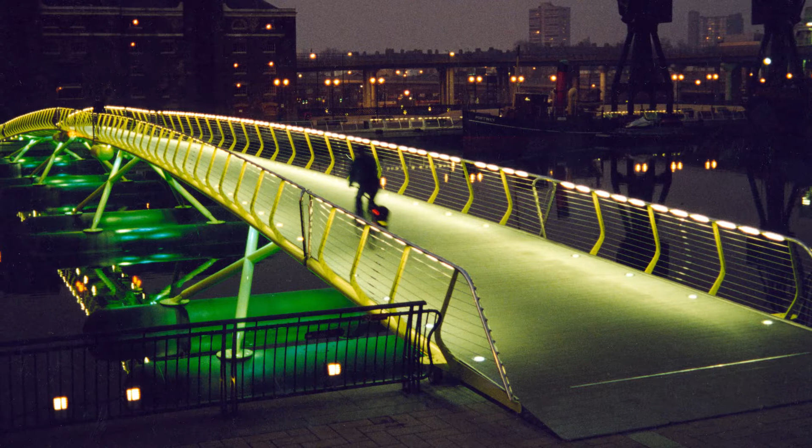From the start, when we were Future Systems, we were keen to challenge the status quo. This bridge in Canary Wharf was the first civilian floating bridge when it was completed in 1996. By creating a low floating structure, we placed emphasis on the horizontal stretch of water rather than the vertical dominance of Canary Wharf. The ambition was for the lightest possible touch, and you can't get much lighter than simply floating on water.

Prefabrication allowed us to de-risk the project somewhat, and when it was completed on time and under budget, it also de-risked Future Systems, as people could see our ability to realise projects.

The media centre at Lord's Cricket Ground was a litany of firsts. Our aim was not, nor has it ever been, to challenge technical boundaries simply because they exist. Our projects are always the result of the balance between form and function. At Lord's, the transformation of a complex brief into an elegant solution that captured the public imagination was made possible by a marriage of technical and conceptual inventiveness.

We created a design to respect and savour the essential nature of Lord's, but also a design that spoke of modernity. It was a vision that our clients supported, even if sometimes they were a little unsure of what we were doing. As the first semi-monocoque building, it represented a breakthrough, not just in the creation of this new three-dimensional aesthetic, but also in its method of construction.

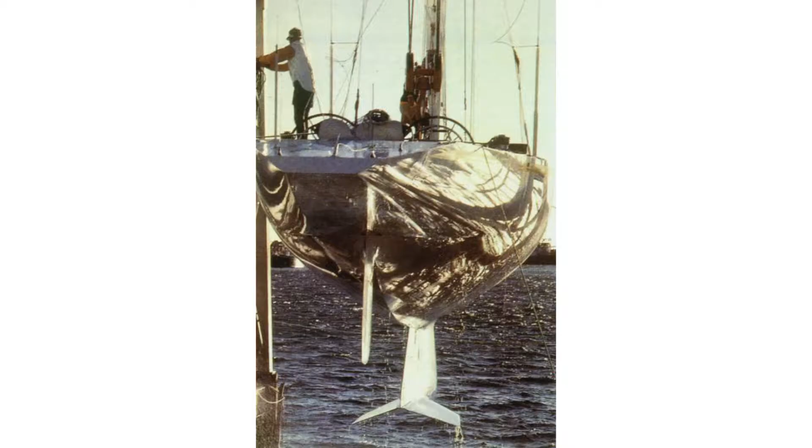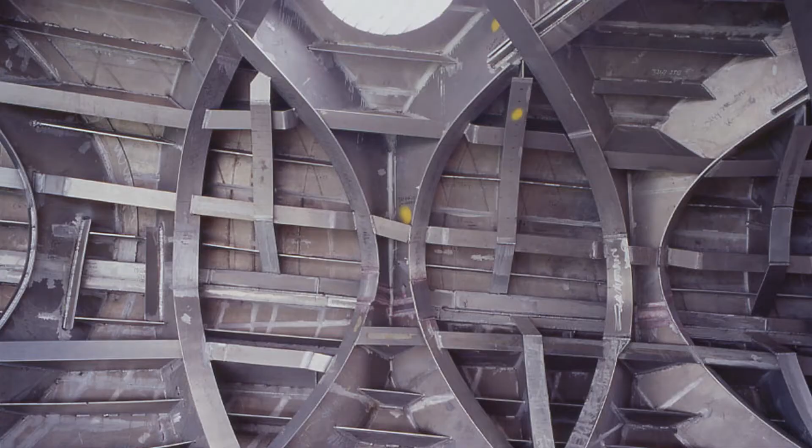The building was built and fitted out not by the construction industry, but by a boatyard, using the very latest advances in boat building technology to create the enclosing skin of a smooth, white, seamless shell. Without realising it at the time, we had designed the first all-aluminium building in the world, which also meant we had to rework building codes to satisfy the fire regulations.

Sometimes you need to prove that you're not wrong, you're just early.

At Selfridges in Birmingham, our ambition was not only to design a state-of-the-art department store, but to create a landmark for the city so that the building itself would become a catalyst for change. The plan traces the line of the site and then pushes beyond the pavement line to maximise floor area. What was not obvious was how to clad this three-dimensional form on a developer's budget.

Finding a means of cladding this curvaceous volume, we took inspiration from fashion. But our real clue came from history. This amazing Baroque church in Naples uses the device of complexity through repetition, playing with light and shadow to break down a massive volume. We reinterpreted this as a skin made up of thousands of aluminium discs. Unlike Lord's, this was not technically complex, but it was a very different way of looking at cladding. We didn't think it was risky, but certainly others did.

Persuading the client to go with a totally bespoke cladding system was not easy, but the discs have become an important part of the identity and iconography of the project.

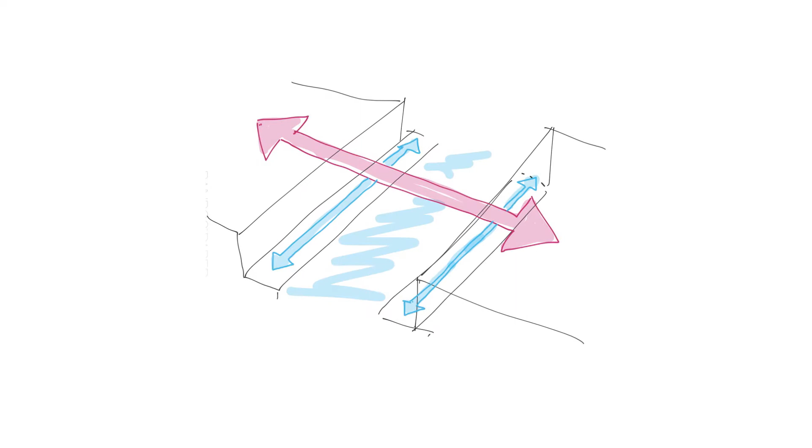The proportions of most bridges are long and slender, but the Spencer Dock Bridge across the Royal Canal in Dublin is almost wider than it is long. Designed to span only 40 metres, it takes trams, traffic and pedestrians across the docklands.

We wanted to exploit these unusual proportions by treating the bridge as a piece of landscape, as a surface rather than a structure. So we had to find a construction technique that would allow us to exaggerate the thinness of the horizontal surface. At the time we were designing the bridge, we were also working on a piece of furniture with a company who produced high-density polystyrene, which we CNC cut to create the structure for the bench.

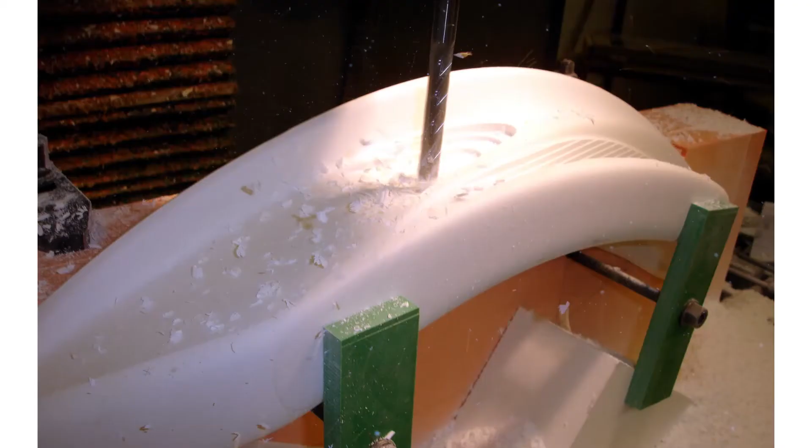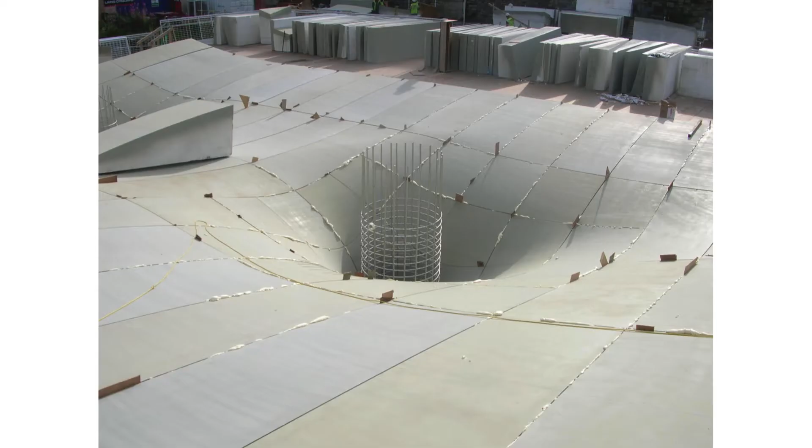This same technique, using polystyrene blocks as permanent formwork, created the desired slenderness for the bridge and proved to be an extraordinarily fast method of construction. This innovative use of CNC cut polystyrene is to date the largest application of the material to be used in this way.

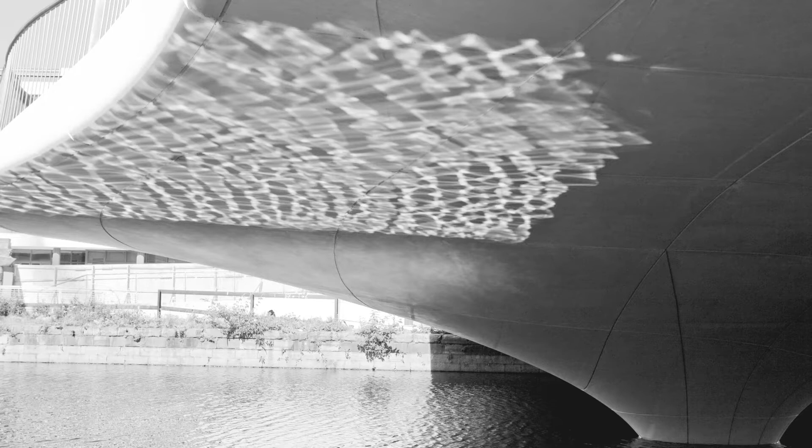The result is a soft geometry with fluid lines and undulating concrete surfaces that allows the bridge to merge with the piers in a single movement. The construction method enabled us to complete ahead of schedule and under budget.

Risky doesn't always have to mean expensive in terms of time or money. There was risk here as to whether we could even make a project out of this building, so I was reluctant to take it on, but we did, so we had to find the potential behind what was a very pragmatic brief to add 3 floors of offices. We needed to be ambitious about the impact that a modest extension could have on the urban context and find a way to give presence to a narrow alley.

The billowing form appears intuitive, but it is in fact a response to the very real constraints of the site: a lack of daylight, an unprepossessing building, and the first 2 floors being by default a blank facade because they hide the storage belonging to Bershka. But we're at our best when we have resistance, so we oversailed the site above pavement level to let in maximum daylight and created more space by doing so, and then created impact.

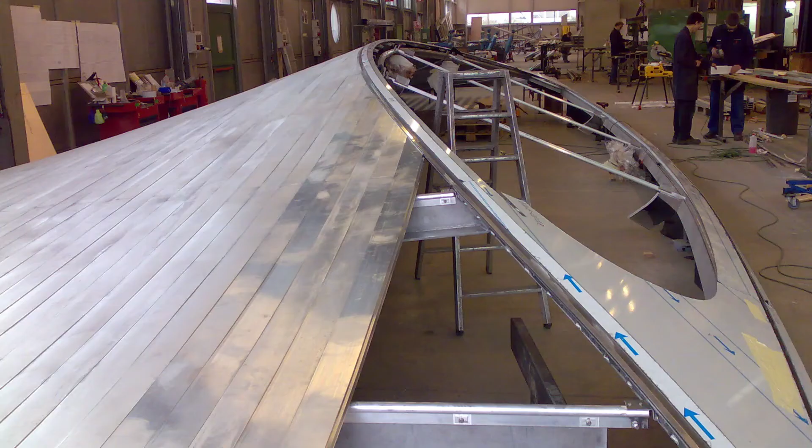We once again transferred technology from the boat building industry, but rather than use aluminium to create a seamless skin as we did at Lord's, we used a system of aluminium profiles used in the production of high-quality ship hulls. But to do this, we had to persuade the builders to warrant the system because we wanted to curve the sheets the opposite way from their system. The altered curvature works well technically and aesthetically and reflects the city back to itself.

A project that may appear to be riddled with risk and over-ambition when viewed from the outside may not always be the case. This subway station for Naples, a collaboration with Anish Kapoor, reimagines the station as a piece of public art, expressing the tension between form and function, between art and architecture.

And yet our intent and proposals were entirely bought into by the client. Even though there were storms, and no project is straightforward, and no project in Italy is without terrible bureaucracy, these were relatively minor and weathered in the early days of the project. We managed to hold on to the integrity of the idea while resolving all of the hugely demanding technical and complex constraints of a public station.

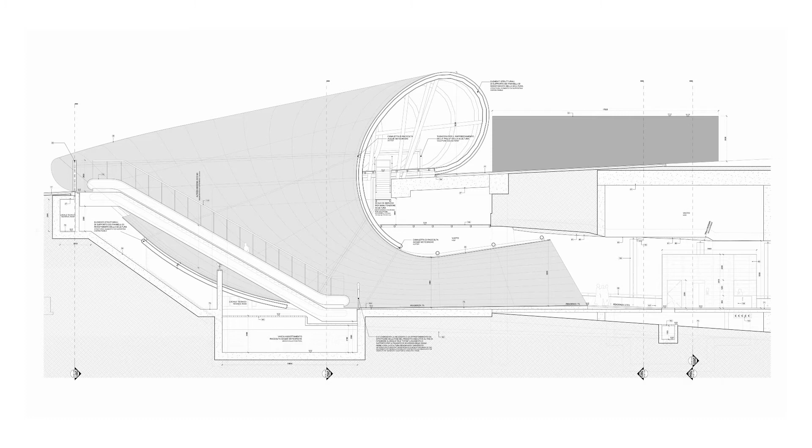It was this idea of resistance as a positive force that I think is the fundamental difference between art and architecture. We brought our confidence and expertise from working with boat builders at Lords and Hills Place so that the design of the entrances fabricated in Holland was relatively risk-free.

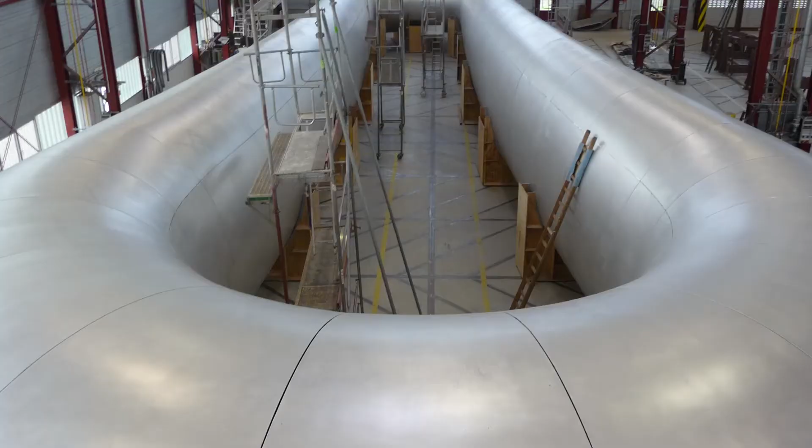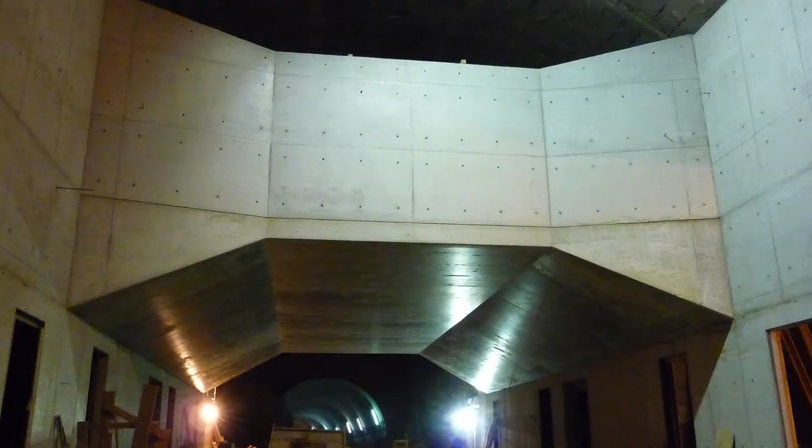The pieces were assembled, signed off and crated up ready for shipment to Naples, but then a new mayor arrived and the spectre of corruption within the municipality brought the project to a halt. The contractors went bankrupt, so the entrances remain in the boatyard. The site was occupied by the construction workers because they hadn't been paid. And the next station has yet to be built, so for now it's a line to nowhere.

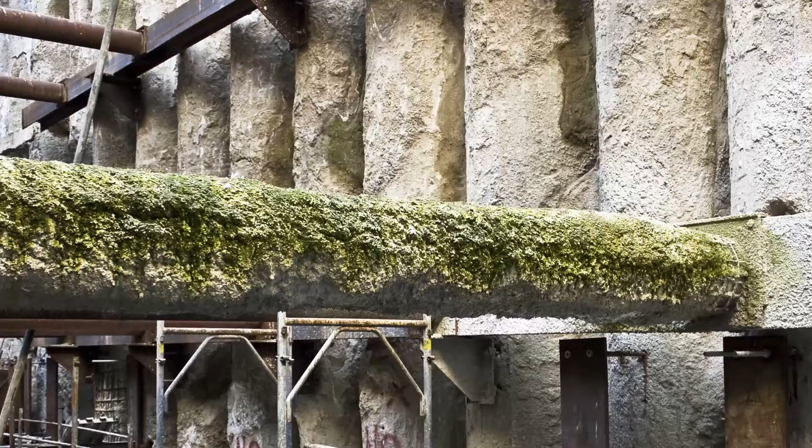Construction has been going on for so long that moss has grown over the exposed concrete piles, but when the project resumes, we intend to keep the moss to illustrate and memorialise the painful birth of the project. The risk in this case was not in our design, but the result of a fragile and overly bureaucratic political system.

We took a calculated risk in this project in going way outside the brief. The competition brief for the Louvre was to improve the visitor experience by addressing the congestion at the point of entry. The pyramid was designed to deal with only a fraction of the number of people who visit the museum today. We instinctively understood that the solution did not lie in the pyramid, but at the threshold of entering the museum.

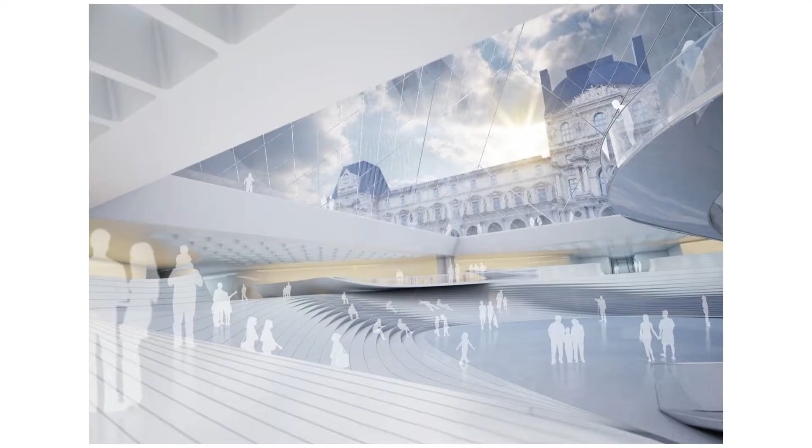So we argued that you should enter through the original palace entrances, and in this way, we could liberate Pei's beautiful pyramid. However, this understanding lost us the competition. In the client's eyes, we were not playing the game. We'd gone way too far by delivering what we felt the Louvre needed rather than what the client asked for.

We lost the competition, but we rescued success from failure, because for us it was a very important piece of conceptual thinking that we have gone on to successfully develop in other projects. What we learned fed directly into our proposals for the competition for the V&A in Exhibition Road.

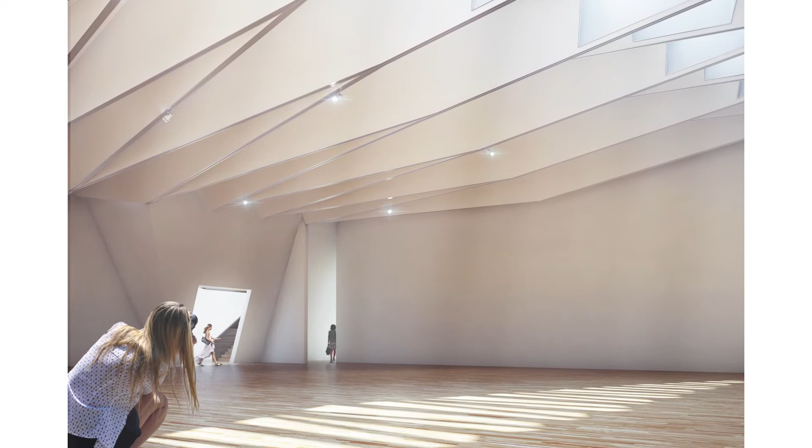Accidents, chance encounters, intuition, twists of fate are as much a part of the design process as logic or forensic analysis. Each project is unique in its complexities, and there's no better example than the V&A.

The brief called for a vast new gallery space to be created below ground and for a new entrance off Exhibition Road, and the creation of a new courtyard above the gallery. So our first move was to reimagine the dialogue between street and museum by breaking down the barrier between the two, allowing people to drift in off the street to use the new courtyard space.

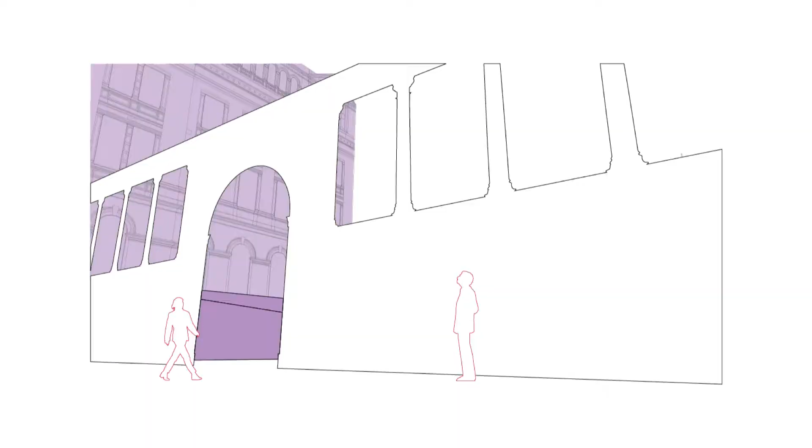But to make this realisable, we had to address the issue of the Grade 1 listed Aston Webb screen, which created an opaque barrier between Exhibition Road and the museum. The screen was originally designed to hide the boiler rooms, which have long since gone, so we argued its purpose was no longer to conceal, but to reveal the fabulous elevations of the V&A.

We took a massive risk in proposing a radical alteration to a Grade 1 listed building. But by opening up the screen and blurring the threshold, taking the museum into the courtyard, we'd unlocked something. It was a risk that ultimately won us the competition.

That the major intervention will be below ground is something of a paradox, and in seeking to resolve this paradox, we came up with a notion of making visible the invisible, which has directed our thinking at every level in this project. Sometimes, in architecture, a very abstract notion can drive a physical form, and that's been the case here.

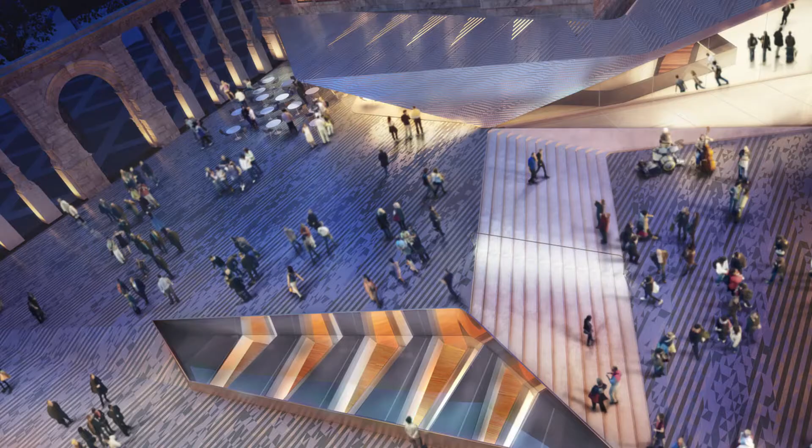We've created, in effect, an outdoor room with a fabulous cafe in the sun, but it's more than that. It gives you an intuitive understanding of the museum. The V&A's mission is to be didactic throughout its buildings and its collection, and we want to continue this tradition by revealing the very structure that supports the courtyard and that's also the roof of the new gallery space below.

We took another risk. Counter to the brief, we let daylight into the galleries. We designed an oculus which is conceptualised as an empty museum vitrine, revealing the gallery roof structure supporting the courtyard. The inside face of the structure is lined with red aluminium to look like the red velvet lining of an old-fashioned vitrine, and through the gaps in the structure you can see the void of the gallery below.

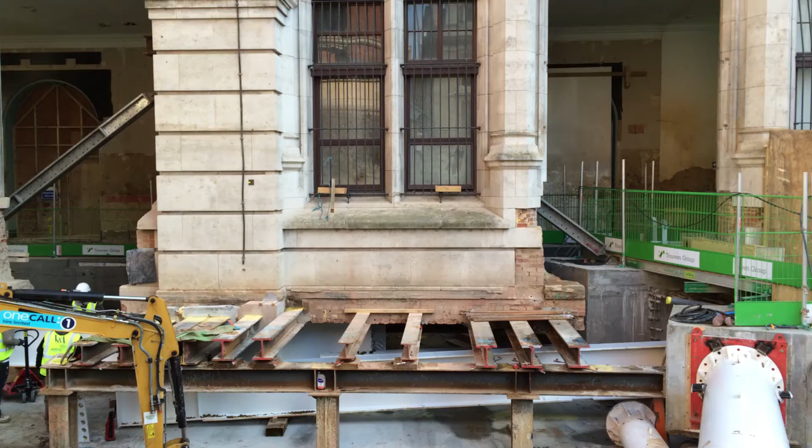This project is a huge technical challenge. We're digging a hole 15 metres below ground, piling 40 metres down within a metre of a Grade 1 listed building, and underpinning a wing of the V&A and its collection as we go.

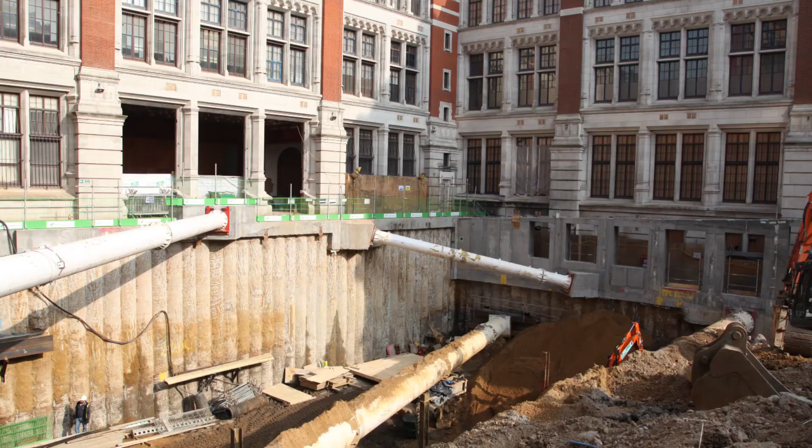Cambridge University was so fascinated by the challenge that they installed fibre optic monitoring systems into the tension piles purely for research, so that tension reduction and uplift can be monitored. The findings will determine if traditional models based on elastic theory accurately represent reality. The results could have repercussions on building sites across the world and perhaps make them a little less risky.

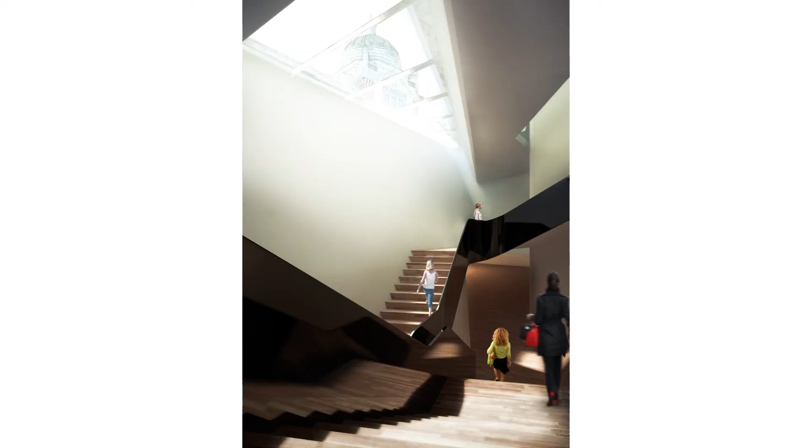Descending 15 metres below ground can be very disorientating, but we framed views to give you an understanding of where you've come from in relation to the rest of the museum. We've created two stairs that slide past each other, one to go up and the other to go down. It's a piece of theatre, partly to deal with the number of visitors, but also to ensure that you exit through the shop and don't enter through it.

We've used daylight to draw you down below ground, and at the bottom of the stairs there's a magic moment where there's more daylight than at the top.

The expression of the ceiling derives entirely from its function of spanning 38 metres, but it also follows in the neo-Gothic and neoclassical museological tradition of ornate ceilings. The structure of the gallery's ceiling was driven by the change of level in the courtyard, which led us to think of the structure as a folded plate.

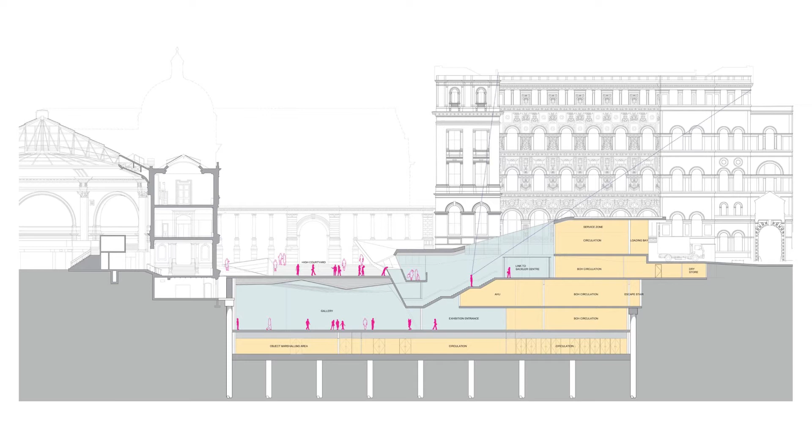As you leave the exhibition space by a different stair, you see the Henry Cole wing reflected in the balustrade before you enter into a new space that we've created through the efficiencies of the folded structure. In the section, you can see the space we've made between the structure and the courtyard, and you're released into this lofty, light-filled space, where you have fantastic views of the recently cleaned sgraffito wall, which had previously been hidden from public view. We've used the structural solution of the roof to generate the pattern of the courtyard surface.

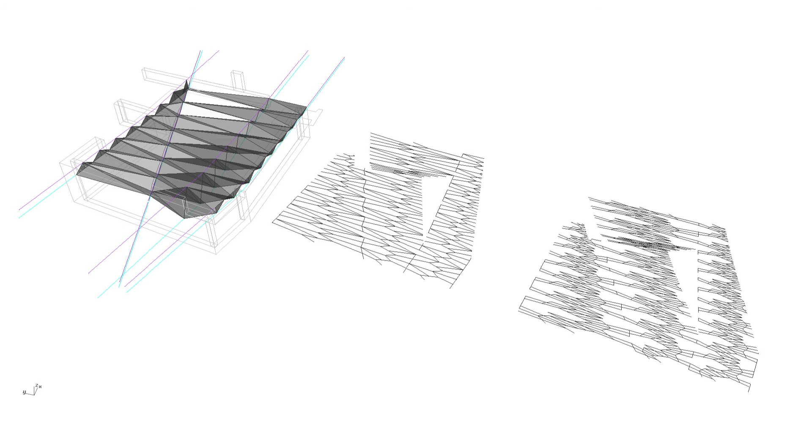It's a subtle but readable expression of what's below. On the left is the structure that resolves the level difference between street and courtyard, and on the right is the pattern. The relation between the two is symbiotic. As the structure deepens, the pattern compresses, and as the structure becomes more shallow, the pattern opens up. So the pattern reads as an abstract expression of the structure, a palpable reflection of the dramatic space below. It also reads more as a colour field than as a series of tiles.

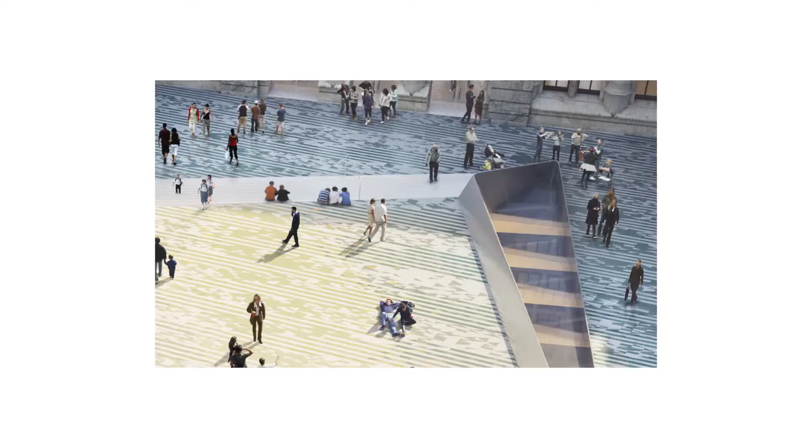An examination of the V&A's ceramic collection and the ceramics embedded in the building itself became our starting point for the design's narrative. To create something that reflects the didactic ethos of the museum and marries art with industry, we set out to explore the limits of ceramics and contextualise it in the design of the courtyard.

But to achieve what we'd imagined required a huge degree of research, and research requires faith because the result is not yet known. It's really quite difficult to say to a publicly funded body such as the V&A, 'Trust me,' but that's what we've done. This certainly tested, but it also deepened our relationship with the V&A.

The research was much more complex and took longer than we'd envisaged, but I'm always going to be grateful to the V&A for their unequivocal support, and it's the one occasion where I've actually relished the slower pace of working with a museum.

We collaborated with manufacturers from 3 European cities, each with an extraordinary history and the dedication to take risks. When the ceramics industry departs from standardised volume production, development follows a more artisanal line in which accidents and difference are prerequisites of advancement.

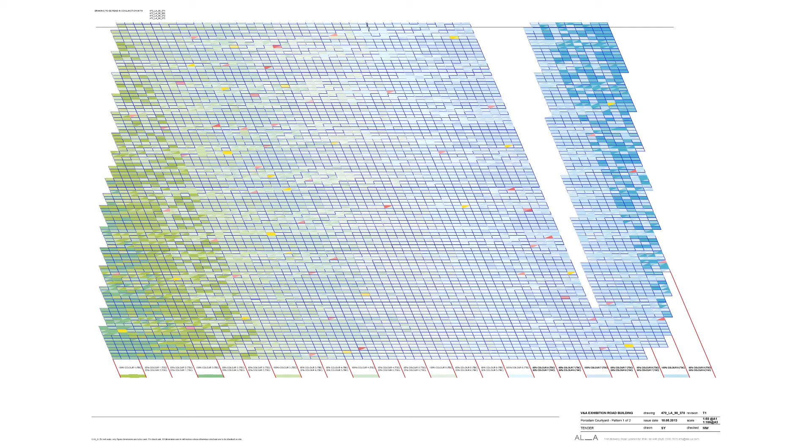It's a process of shared learning that relies on trust and mutual respect. We ask a lot from our partners, and it's a privilege to work with people who share a desire to explore. After 2 years of research and testing, we've been rewarded with a beautiful set of tiles that represents a huge step forward for what will be the first porcelain courtyard in the world.

While working on the Exhibition Road project, we were commissioned by the London Design Festival and American Hardwood Export Council to create an installation at the entrance to the V&A. It is the product of its contextual response to the ornateness of the V&A structure.

It brings the expression of material, structure and public engagement into a single piece. It doesn't make distinctions between structure and aesthetic, structure and message, innovation and functionality.

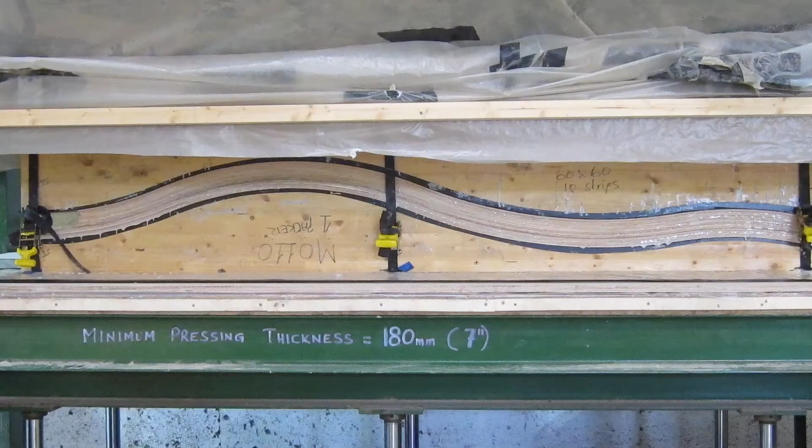We took lamination techniques more usually used in furniture making and applied them at a different scale to create a self-supporting arch structure some 3 stories high, so that when you see the piece from certain vantage points, it reflects the grand proportions of the arch.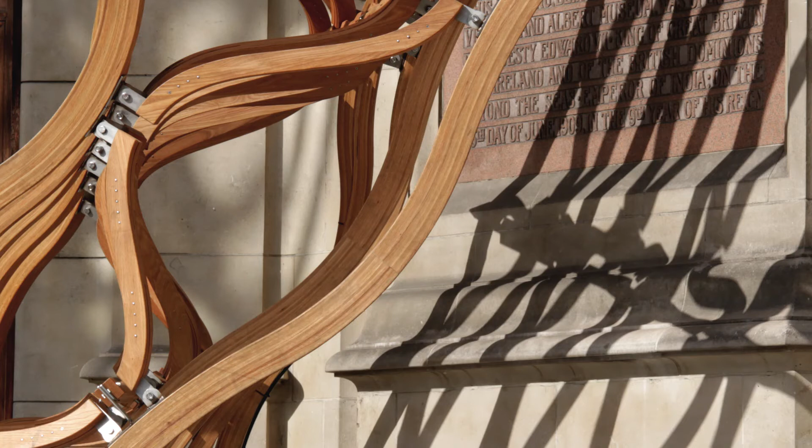It was the first time that American red oak had been used structurally. The timber entrance is 3-dimensional and asymmetric, with each timber piece precisely calibrated for optimal structural performance. But it very nearly failed.

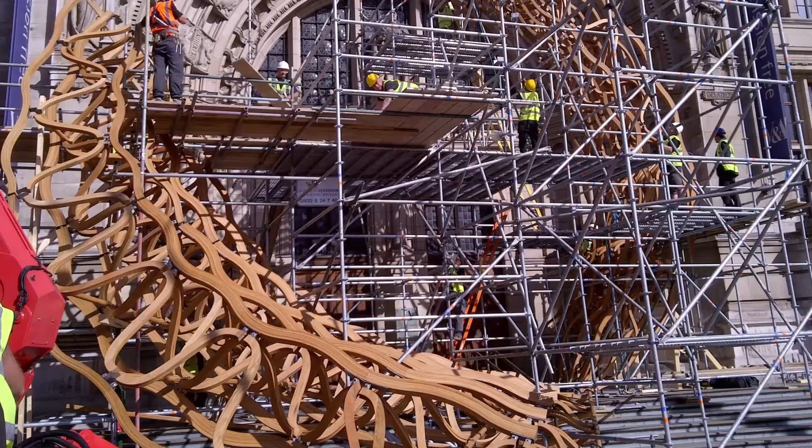The complexity of the self-supporting structure demanded extreme logistical analysis of assembly, an aspect that we'd underestimated at the outset of the project. The main entrance to the V&A should have been closed for just 4 days, but instead it took 2 weeks for installation.

After the scaffolding came down, everyone forgot about the inconvenience, and our piece became a huge talking point. The V&A even tried to persuade us to keep it up for longer. But for me, the power of something can be greater if it has a limited lifespan.

Our obsession with ceramics at the V&A led to a project that encapsulates for me the joy, the dangers, and even the addictiveness and the necessity of risk.

The ceramic table is probably one of the most ambitious pieces of research we've ever undertaken, yet it's for one of our smallest projects. It's a piece that challenges perceptions of ceramics' materiality and structure, history and modernity, form and function. We didn't realise that as we undertook research to understand and to challenge the potential of ceramics, that we'd

set out on a journey where each new discovery fueled a desire to continue examining the material's capabilities. As we chased perfection, the ceramic table became as much a story about the process of making and the uniqueness of ceramics as the piece itself.

A seemingly impossible piece that combines incredible strength and visual fragility, the ceramic table embodies an everyday item with new meaning. It articulates the structural performance of ceramics to make an exquisitely beautiful yet functional object.

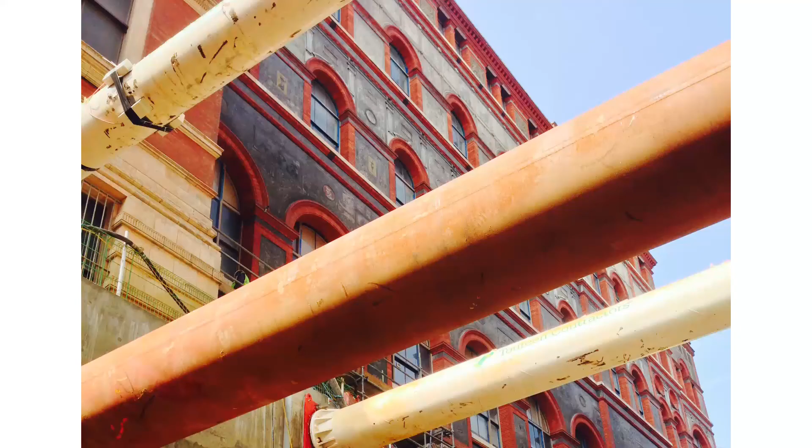By being merely pragmatic, using only rational thought, desperate to know whether what we do is right, by being Iagos, in other words, we destroy the very basis upon which the good or noble things in our life exist. Rice's claim is both poetic and true.

Pushing the limits of what is possible is what drives us as designers. But when your client is a public body, it's far from straightforward. The constraints are real and sometimes surreal.

Decision-making structures at the V&A are Byzantine in their complexity. So it takes time to assure the stakeholders that the risks in a scheme are noble and therefore worth taking. But time on a project is not infinite, and so we have to have an unshakable belief that collectively we have the ability to solve problems that we don't even know exist.

Using our powers of persuasion to advance the debate through research is all part of the complex process of design, and it's this that gives me a sense of purpose as an architect. It's how we should reclaim and begin to celebrate risk in architecture.